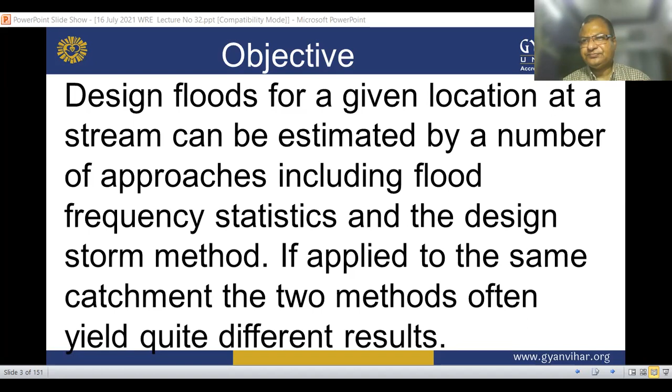This is runoff and flood frequency analysis. The design flood for a given location on a stream can be estimated by a number of approaches, including flood frequency statistics and the design storm method. If applied to the same catchment, the two methods often vary quite differently. The aim of this topic is to contribute to understanding the reason for the differences.

A case study was performed for 10 alpine catchments in the Tyrol, Austria, where the 100-year floods are estimated by A, flood frequency statistics, and B, an event-based runoff model. To identify the source of difference between the two methods, the 100-year floods are also estimated by C, Monte Carlo simulation using a continuous runoff model.

The results show that in most catchments, the event-based model gives larger flood estimates than flood frequency statistics. The reason for the difference depends on the catchment characteristics and the different rainfall inputs applied. For catchments with a high storage capacity, the Monte Carlo simulation indicates a step change in the flood frequency curve when the storage threshold is exceeded, which is not captured by flood frequency statistics, and flood frequency statistics therefore tend to underestimate the floods in these catchments.

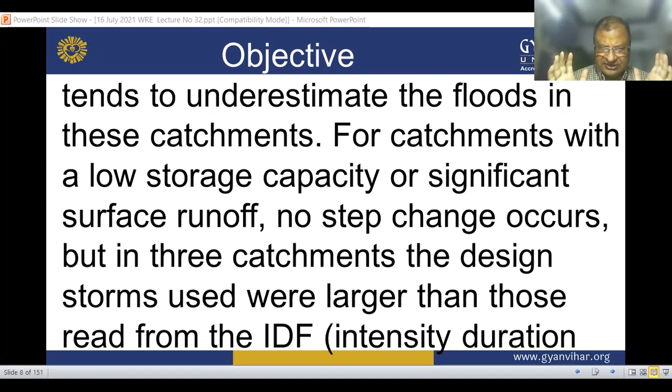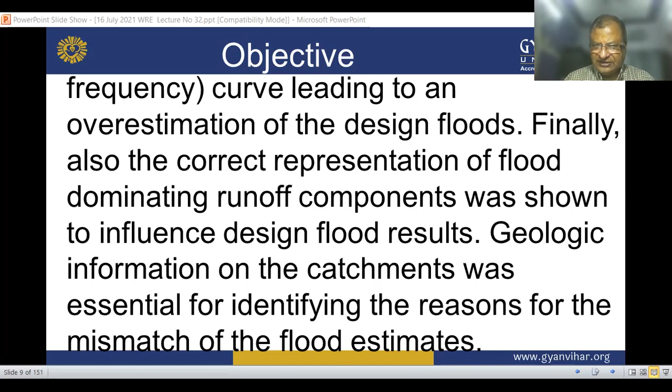For catchments with a low storage capacity or significant surface runoff, no step change occurs. But in three catchments, the design storms used were larger than those read from IDF, intensity-duration-frequency, curves, leading to overestimation of the design flood. Finally, the correct representation of the flood-dominating runoff components was also shown to influence design flood results. Geological information on the catchment was essential for identifying the reasons for the mismatch of the flood estimates.

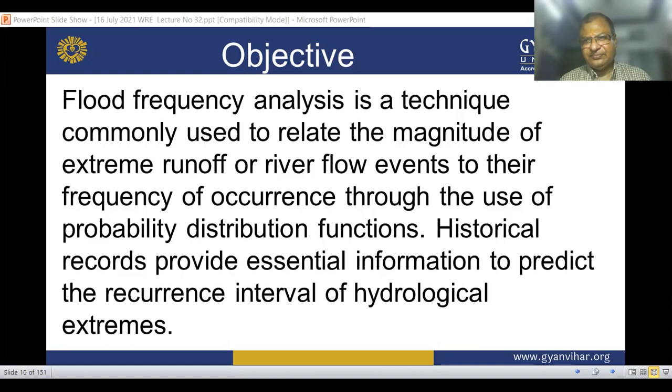So flood frequency analysis is the technique commonly used to relate the magnitude of extreme river runoff and flow events to their frequency of occurrence through the use of a probability distribution function. Historical records provide essential information to predict the recurrence interval of hydrological extremes. Such information on high flow events is crucial in many cases: dike design for flood protection, reservoir design and management, river pollution control, and ecology management.

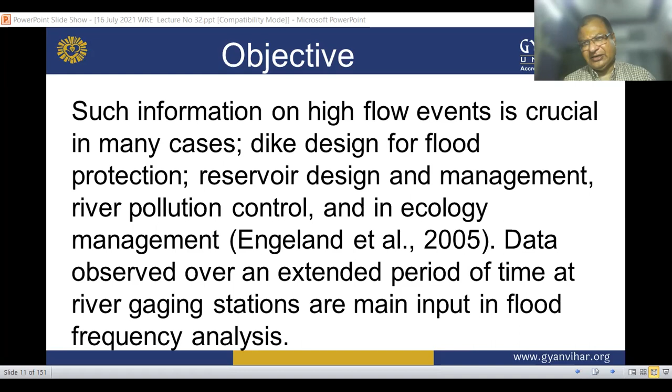Data observed over an extended period of time at river gauging stations are the main input of flood frequency analysis. An assumption is made that flood data are space and time independent, identically distributed, and undisturbed by natural or man-made changes in the hydrological system, Rao and Hamed 2000. The analysis estimates the recurrence interval of extreme events by extrapolating beyond the length of the record. Obviously, the longer the available data, the more accurate the estimations are. Infiltration.

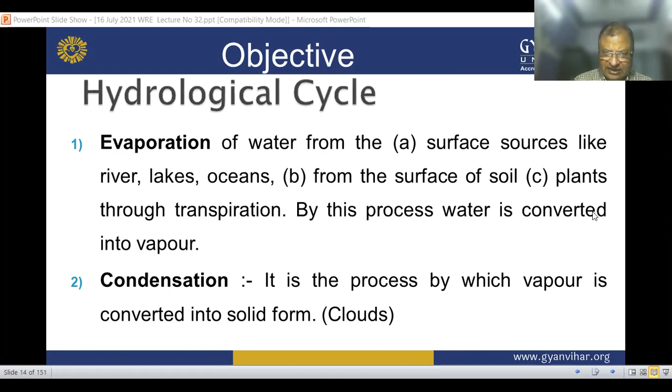So, the hydrological cycle. Evaporation of water from surface sources like rivers, lakes, oceans, from the surface of soil, and from plants through transpiration. By this process, water is converted into vapor. Condensation is the process by which vapor is converted into solid form, cloud.

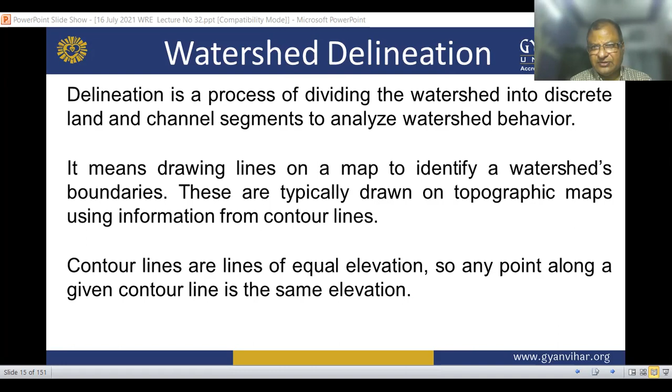Now, delineation is the process of dividing the watershed into discrete land and channel segments to analyze the watershed behavior. It means drawing lines on a map to identify a watershed boundary, typically drawn on a topographic map using the information of contour lines. Contour lines are lines of equal elevation, so any point along a given contour line has the same elevation. Now, infiltration: after water reaches the ground, it is infiltrated into the ground. And surface detention: some part of the water is stored in the depressions present on the ground.

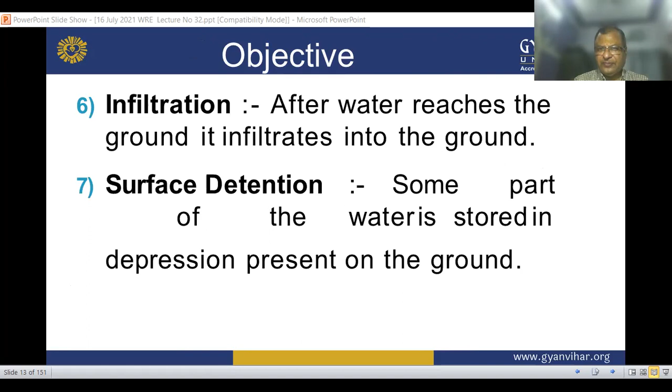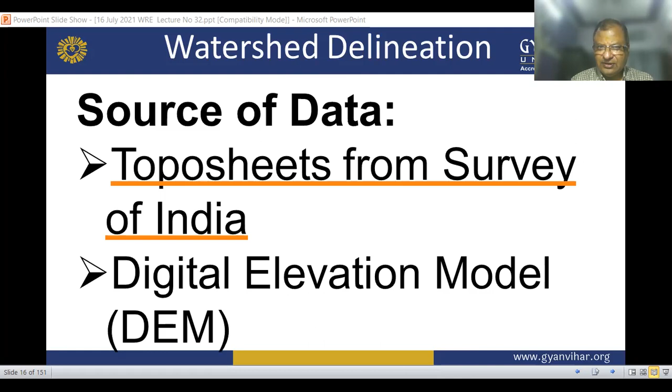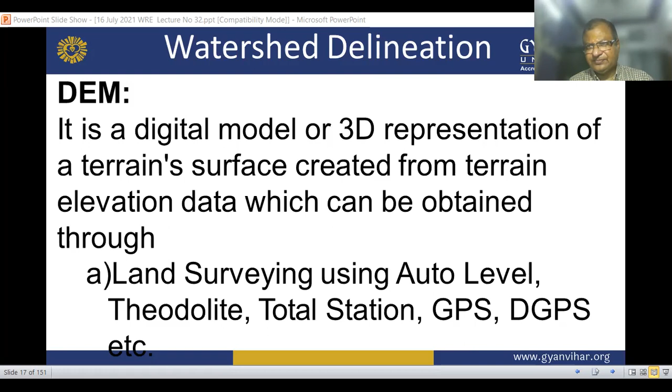Now, watershed delineation. Sources of data: toposheets from the Survey of India and digital elevation models, DEM. A DEM is a digital model or 3D representation of the terrain surface created from terrain elevation data, which can be obtained through land surveying using auto level, theodolite, total station, GPS, DGPS, etc. Next, remote sensing: aerial photography, lidar, light detection and ranging, which measures distance by illuminating a target with a laser and analyzing the reflected light, and satellite images such as CartoDEM.

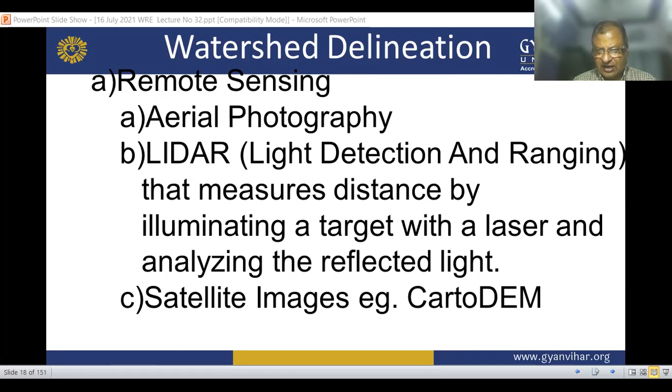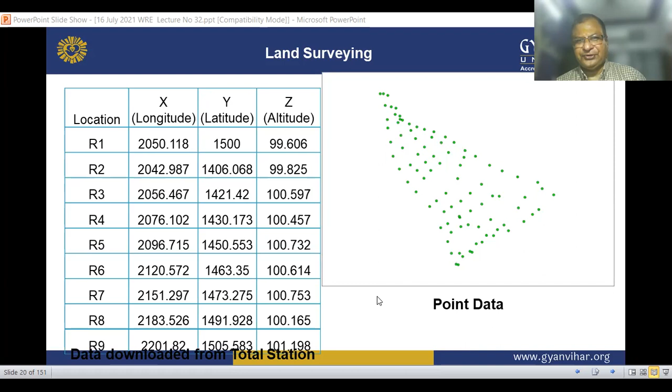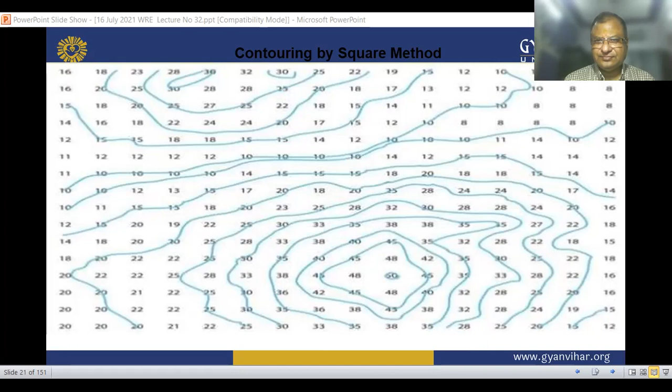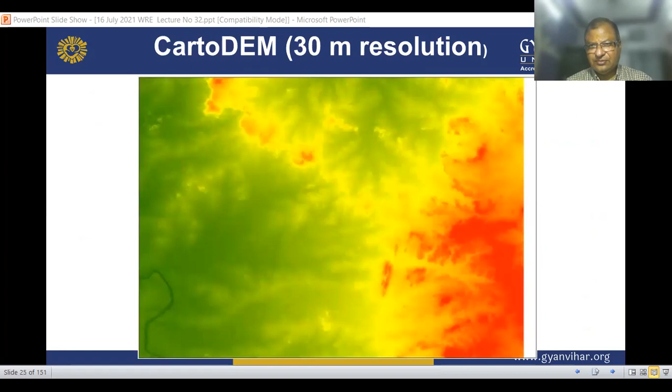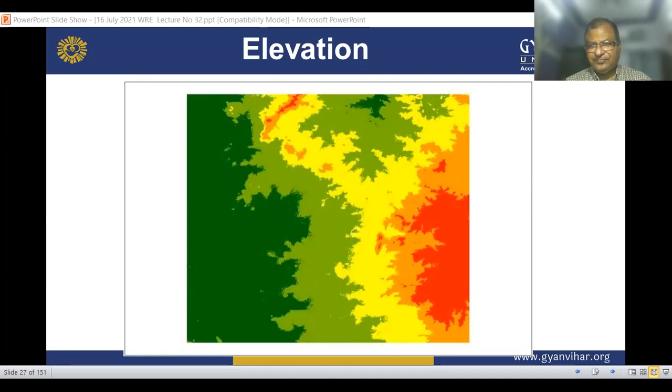So this is the example for this data, land survey, and this is the contour data. This is the contour with a 3D digital model, and this is the remote sensing. CartoDEM at 30-meter resolution. And this is also the 3D dimension. And this is the elevation. This is the contour data. This is the next contour data.

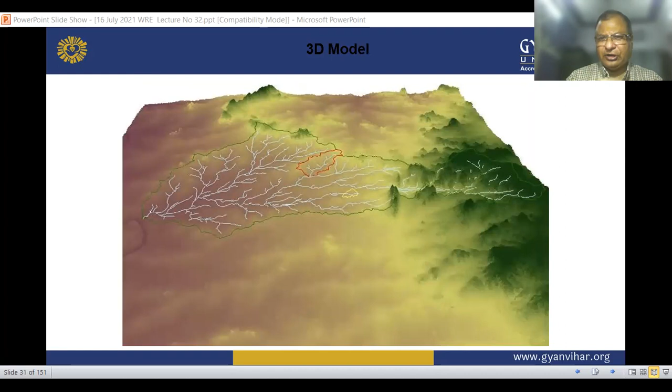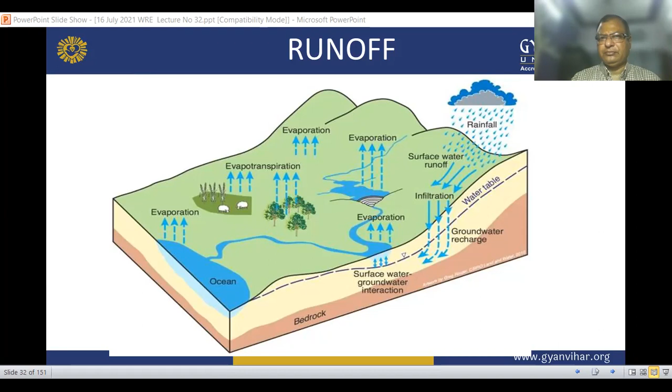This is a 3D model. This is the runoff, and the location of the runoff. Actually, see this picture. In this picture, this water we have stocked or stored. That is the runoff. So, runoff computation.

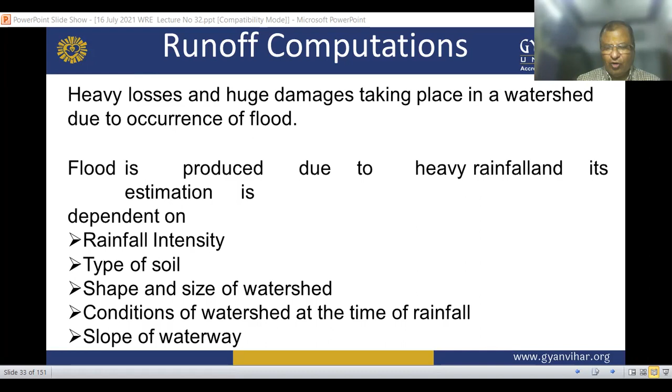Heavy losses and huge damage take place in the watershed due to the occurrence of floods. Flood is produced due to heavy rainfall, and its estimation is dependent on rainfall intensity, type of soil, shape and size of watershed, condition of watershed at the time of rainfall, and slope of the waterway. So, runoff computation and methods of estimation of the runoff.

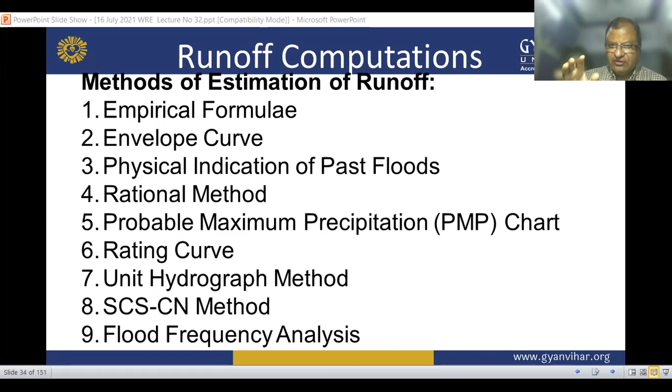The empirical formula, envelope curve, physical indication of past flood, rational method, probable maximum precipitation and rating curve, unit hydrograph method, SCS-CN method, and flood frequency analysis. So, runoff computation: this is the empirical formula. Dicken's formula: Q = C A^(3/4), where Q is the design flood, A is the catchment area, and C is Dicken's constant, for North Indian plains, North Indian hilly regions, central India, and coastal Andhra and Odisha.

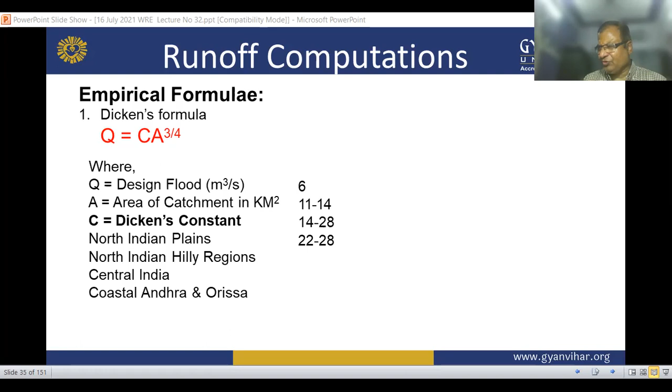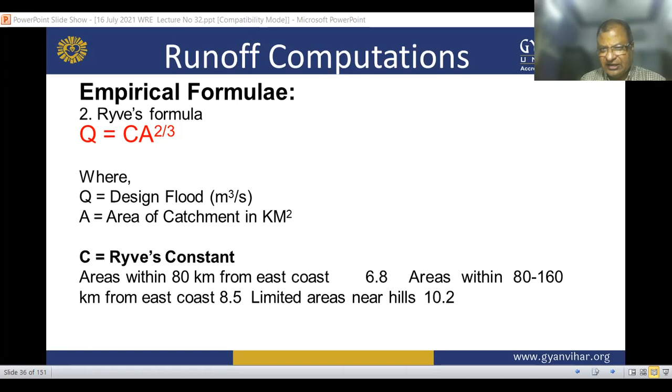Now, empirical formula. Ryve's formula: Q = C A^(2/3), where Q is the design flood, A is the area of catchment in square kilometers, and C is Ryve's constant: area within 80 kilometers from the east coast, 6.8; area within 80 to 160 kilometers from the east coast, 8.5; limited area near hills, 10.2.

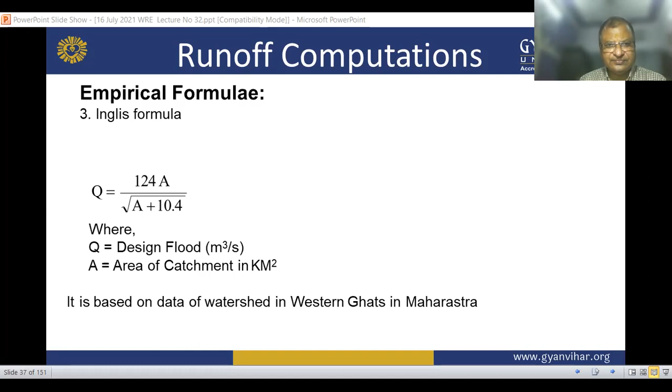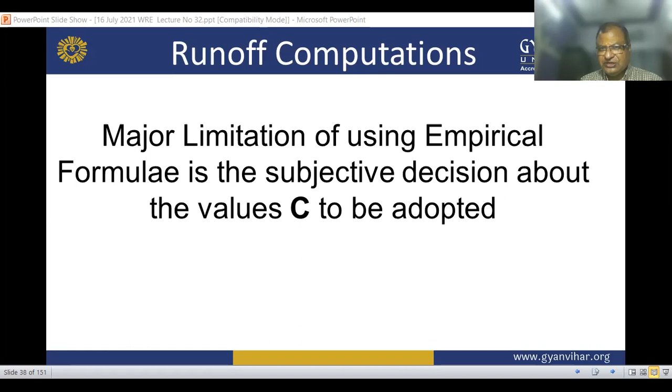Next, runoff computation with empirical formula: Inglis formula. Discharge Q = 124A / √(A + 10.4), where Q is the design flood and A is the area of catchment in square kilometers. It is based on data of watersheds in Western Ghats in Maharashtra. Now, the major limitation of using empirical formulas is the subjective decision about the value of C to be adopted.

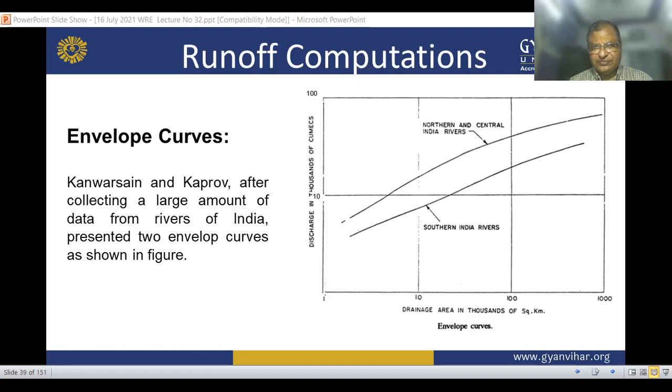Now, physical indication of past flood. Ancient monuments situated near the bank of a river always bear the marks or records of past floods. So the flood discharge is obtained from the formula Q = A × V, meaning discharge equals area into velocity, where A is the cross-sectional area of the valley during the flood, and velocity of flow can be calculated from Manning's n, usually with a factor of safety of about 1.5 applied to the maximum.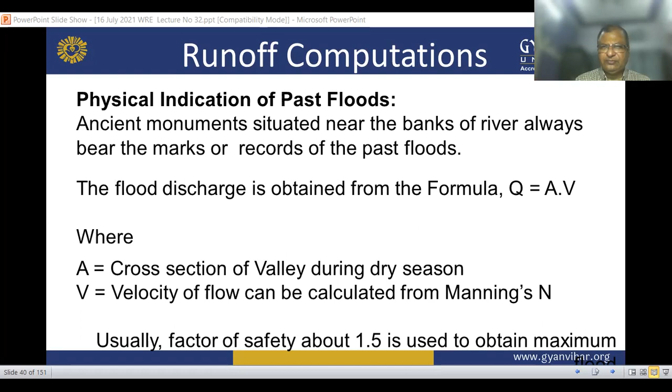Now, the rational method. It is most effective in urban areas with a drainage area of less than 200 acres, and the method is typically used to determine the size of storm sewers, channels, and other drainage structures. Discharge Q = CIA / 3.6, where C is the runoff coefficient, I is the rainfall intensity, and A is the area of catchment in square kilometers.

Now note, rainfall intensity can be found from the intensity-duration-frequency (IDF) curve corresponding to the time of concentration and the return period.

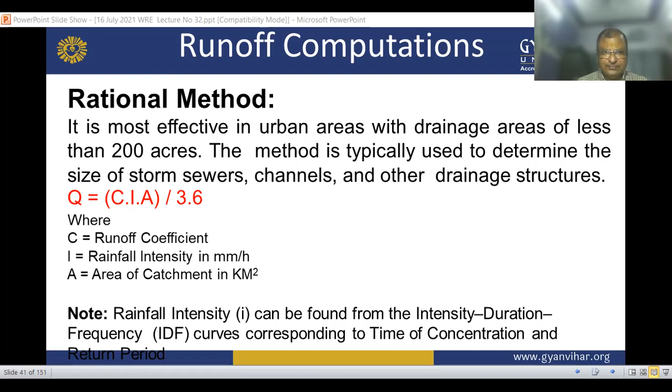Runoff coefficient C is the type of correction we use in this formula, where the value of C is this.

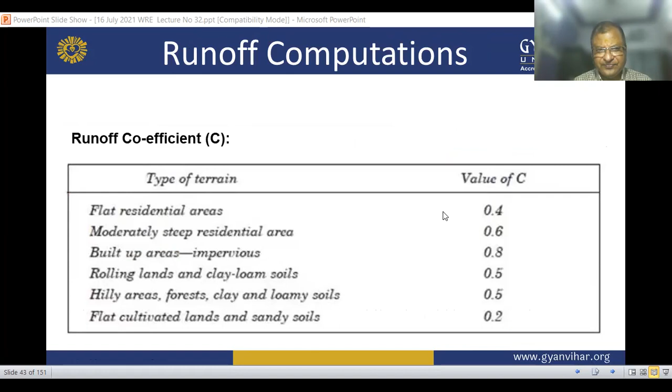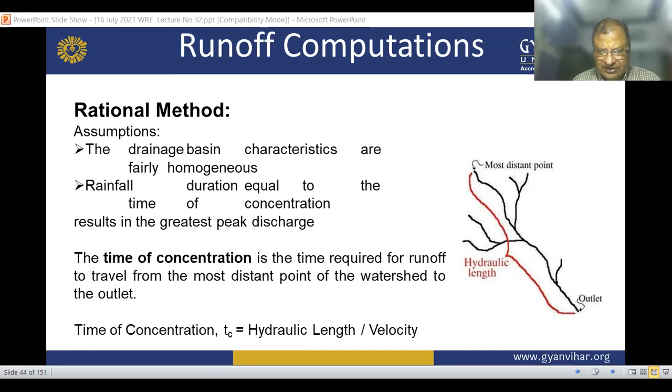Now, runoff computation in the rational method. The assumption is that drainage basin characteristics are fairly homogeneous. The rainfall duration equal to the time of concentration results in the greatest peak discharge. The time of concentration is the time required for runoff to travel from the most distant point of the watershed to the outlet, and time of concentration is equal to hydraulic length over velocity.

In the rational method, time of concentration can be found using T is equal to 0.00032 multiplied by L to the power 0.77 upon S to the power 0.385, where T is the time of concentration and L is the maximum length of water travel.

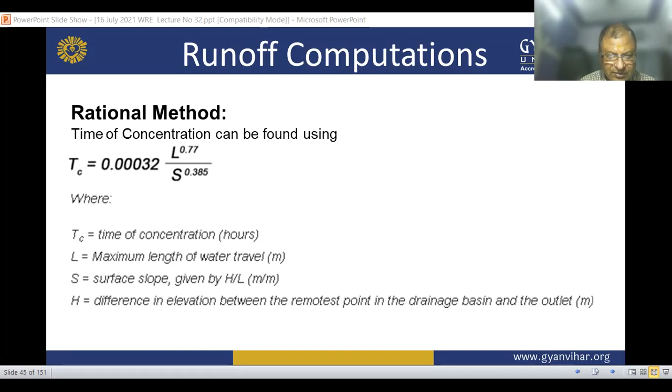Now, probable maximum precipitation chart. PMP charts have been prepared by the Meteorological Department of India for some states such as Punjab, Haryana, Delhi, Rajasthan, using the following methods: the meteorological method and statistical study of rainfall data.

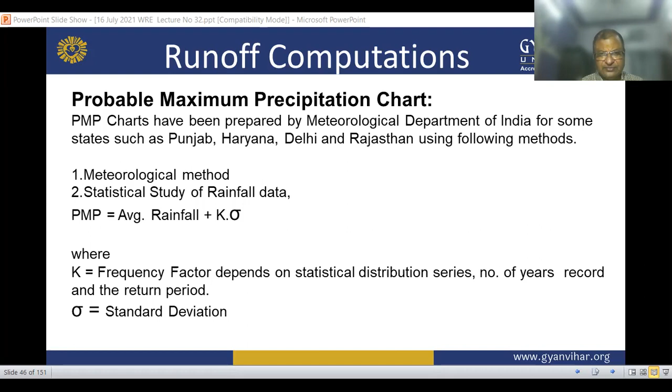Now, unit hydrograph method. It is the linear model of the catchment which is used to find out the volume of direct surface runoff, DSR, due to 1 centimeter of rainfall excess. If a rainfall on the catchment produces 2 centimeters of excess rainfall, the ordinates of the DSR will be twice such ordinates, and the volume of DSR will be twice the volume of the unit hydrograph.

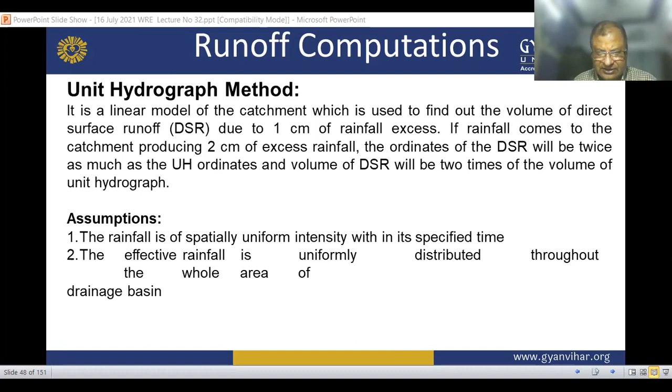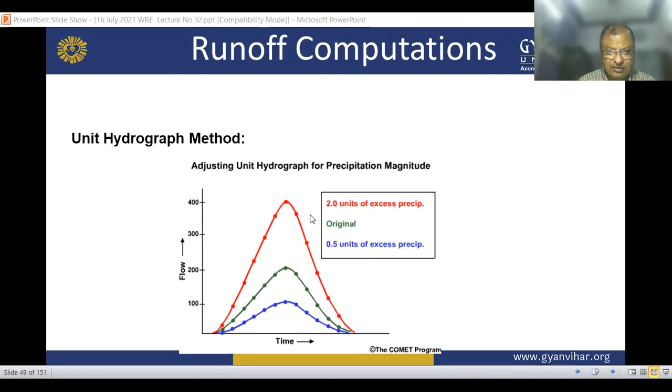Now, SCS-CN method. The curve number method was developed by the USDA Natural Resources Conservation Service, formerly called the Soil Conservation Service or SCS. The curve number is based on the area's hydrologic soil group, land use, treatment, and hydrologic condition.

Now, SCS-CN is actually a formula. In this formula, P is equal to rainfall and S is the potential maximum retention after runoff begins.

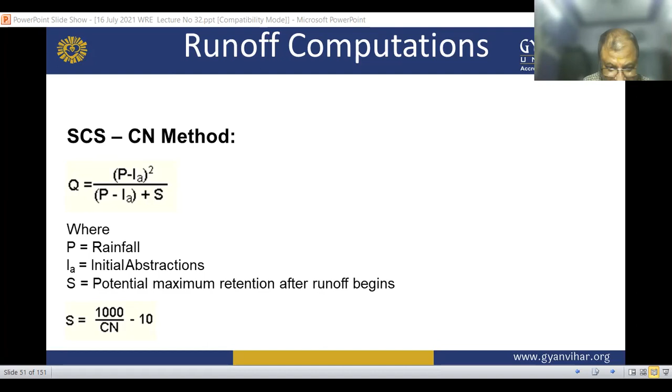Now, hydrologic soil groups. HSG group A: low runoff potential soil with high infiltration rate when thoroughly wetted, final infiltration rate greater than 0.3 inches per hour. HSG group B: soil with moderate infiltration rate when thoroughly wetted, final infiltration rate 0.15 to 0.30 inches per hour.

HSG group C: soil with slow infiltration rate when thoroughly wetted, final infiltration rate 0.05 to 0.15 inch per hour. And HSG group D: high runoff potential soil with very slow infiltration, thoroughly wetted final infiltration rate less than 0.05 inch per hour. This is the chart.

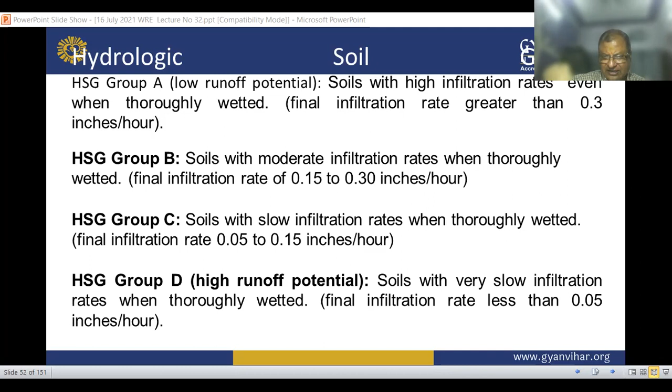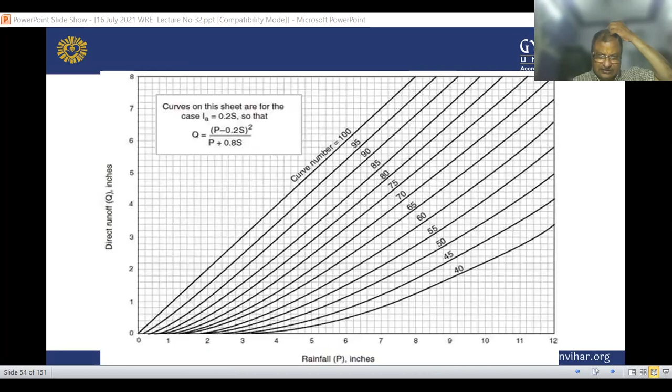Now, high runoff potential: the soil with very slow infiltration rate when thoroughly wetted, and final infiltration rate less than 0.05 inches per hour. And this is the standard chart. This is also a chart.

Now, flood frequency analysis: estimation of design flood. Return period, also known as the recurrence interval, is an estimate of the likelihood of a river discharge or flow to occur. For example, a 10-year flood.

For example, a 10-year flood has a 1 by 10, or 0.1, or 10% chance of being exceeded in any 1 year. This does not mean the flood will happen at such an interval; instead, it means that in any given year there is a 10% chance it will happen, regardless of how long ago the last similar event was.

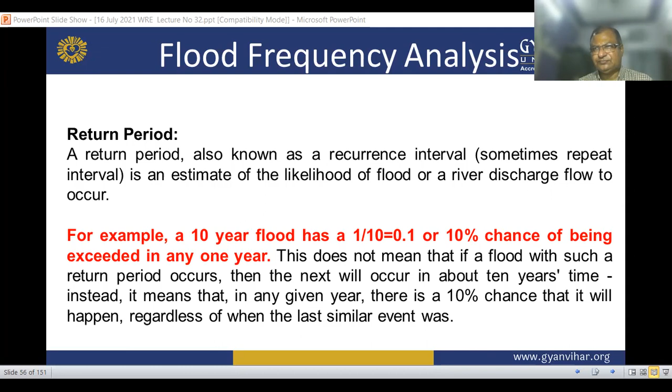Now, return period is a statistical measurement typically based on historical data and basically used for risk analysis, to decide whether a project should be allowed to go forward, and design structures in a watershed are designed with a certain return period.

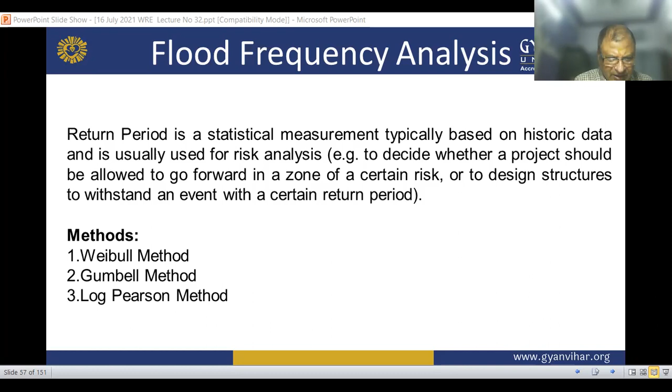So what are the methods? Actually, the Weibull method, Gumbel method, and Log-Pearson method. So what is the Weibull method? In probability theory and statistics, it is a continuous probability distribution. It is the most commonly used method, and values are distributed uniformly between 0 and 100%.

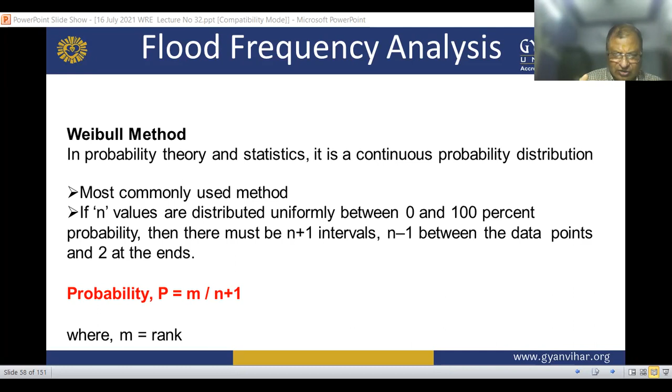And for probability, there must be n plus 1 intervals for n data points. Probability P is equal to m upon n plus 1. And this is the example. Consider the

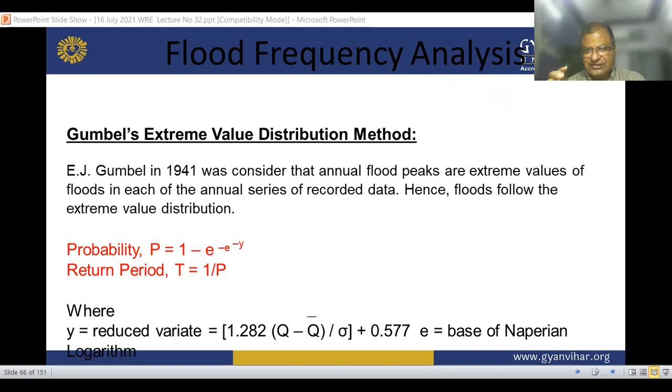where y is the reduced variate, 1.282. This is the formula. And again, the Gumbel extreme value distribution method is shown here.

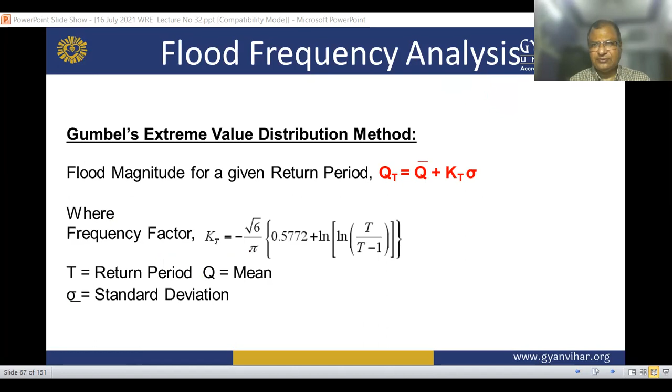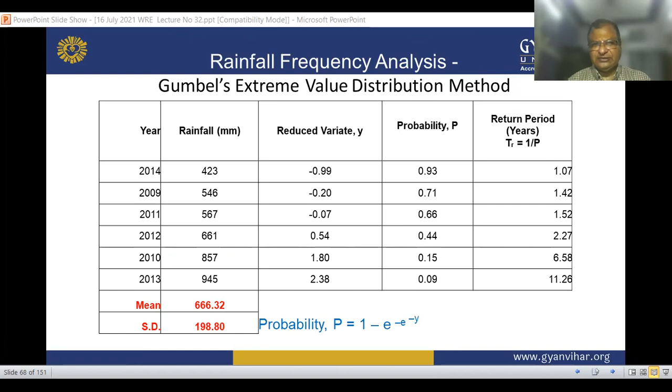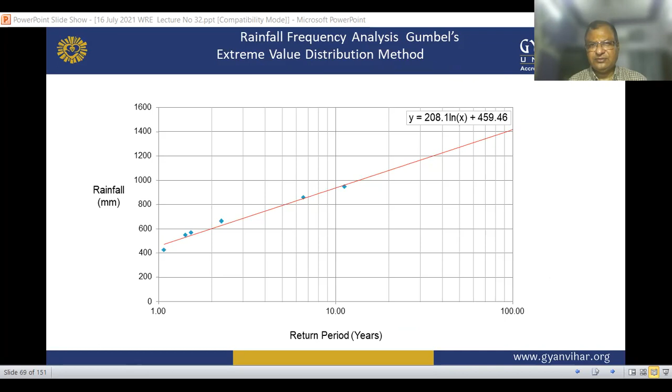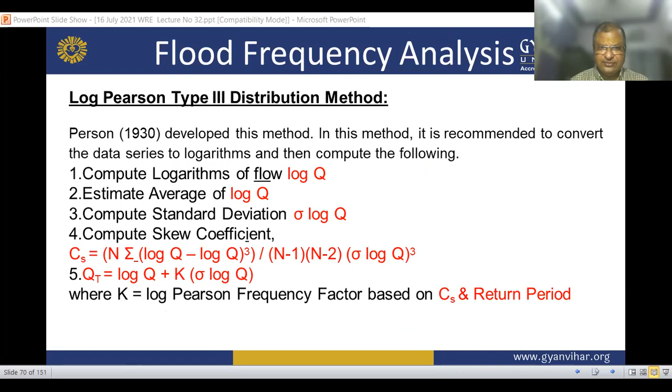And this is the rainfall frequency analysis, Gumbel's extreme value distribution method by distribution method. And rainfall frequency analysis, Gumbel's extreme value distribution method by the chart. Now, log Pearson type III distribution method. So, this is the year-wise log Pearson type III distribution method, and it was developed in 1930. And log Pearson type III distribution method, after putting in the values, this result has come.

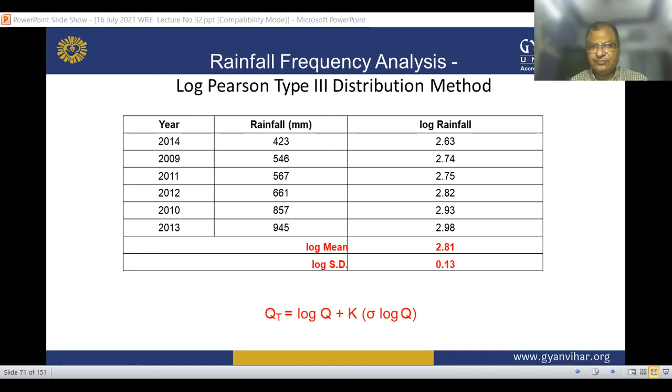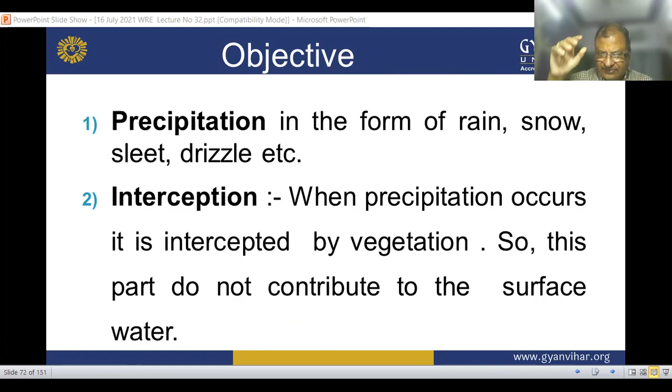So, precipitation is in the form of rain, snow, sleet, drizzle, etc. What is interception? When precipitation occurs, part is intercepted by vegetation, so that part does not contribute to the surface water. Water which flows on the ground or surface and joins a channel is called surface runoff. Groundwater flow and interflow: the water which infiltrated into the ground and joins the stream at a later stage is called interflow.

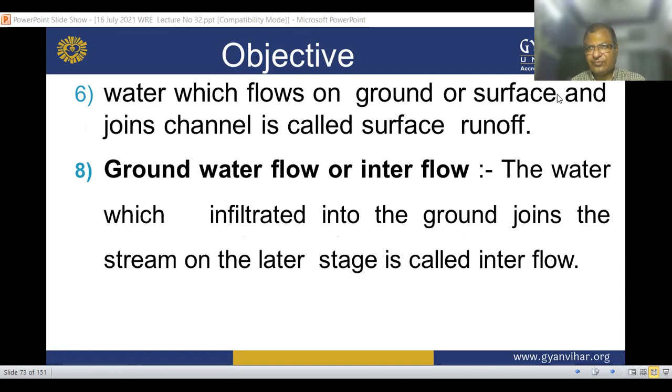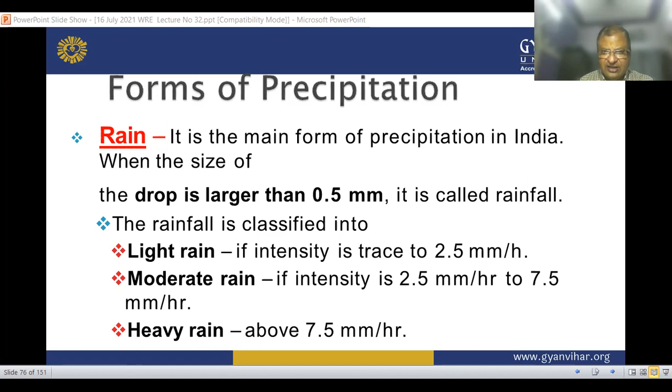Now, forms of precipitation. Rain is the main form of precipitation in India; when the size of the drop is larger than 0.5 mm it is called rainfall. And the rainfall is classified into light rain, intensity 2.5 mm per hour, moderate rain, intensity 2.5 mm to 7.5 mm per hour, and heavy rain, above 7.5 mm per hour.

So, forms of precipitation. Snow is made up of one or more tiny ice crystals that come together to form the unique shape of the snowflake. Drizzle is a light liquid precipitation consisting of liquid water drops smaller than those of rain, generally smaller than 0.5 mm diameter and having intensity less than 1 mm per hour.

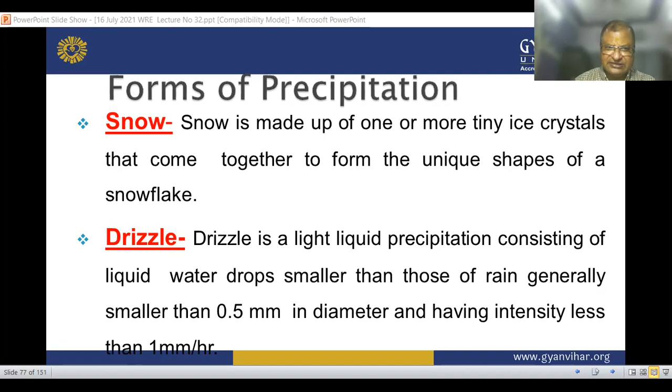Now sleet, a mixture of rain and snow: when the temperature of the atmosphere near the ground is 0 degrees, the precipitation will be a mixture of rain and snow. And dew is formed by condensation on the ground during the night, when the surface has been cooled by outgoing radiation.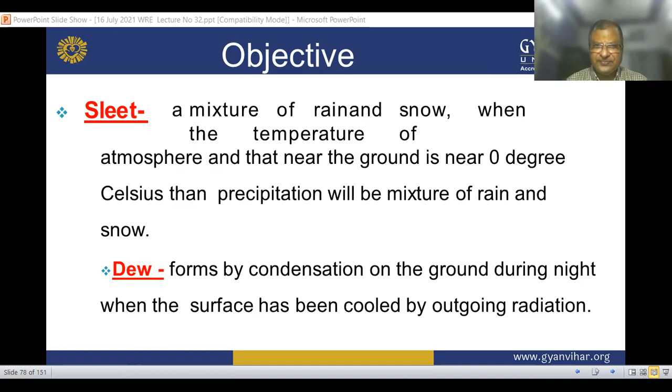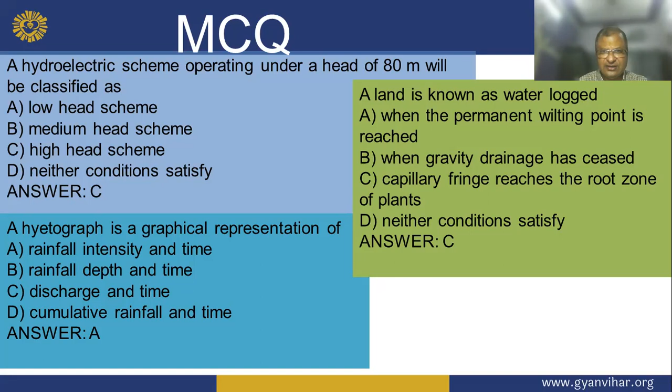Now, a land is known as waterlogged when... So which is the correct answer? The correct answer is C, the capillary fringe reaches the root zone of the plant. And the next question is, a hyetograph is a graphical representation of, and which is the correct answer? The correct answer is A, rainfall intensity and time. Now, next question, a 70% index of wetness means? Which is the correct answer? Yes, the correct answer is B, that is a rain deficiency of 30%.

Now, a deep well... is always deeper than a shallow well. Which is the correct answer? The correct answer is B, has more discharge than a shallow well. And the next question, a current meter is used to measure the, which is the correct answer? The correct answer is A, velocity of flow of water. And the last question, a divide wall is provided at right angles to the axis of the weir. This is the correct answer, answer A.